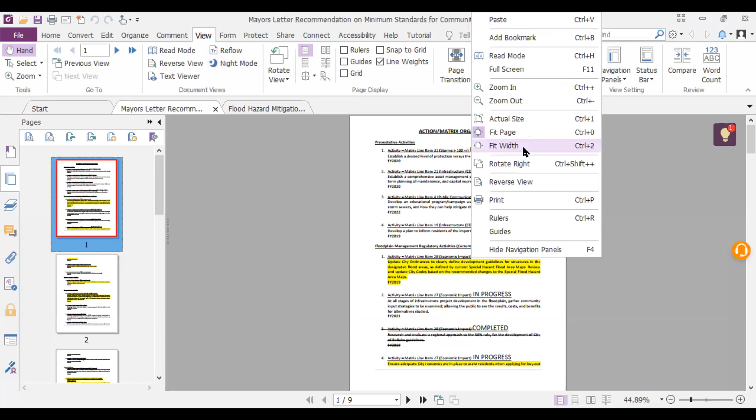Good evening. So before I get into my presentation, what I have up on the screen will look familiar to many of you that have taken part in these meetings in the past. I just want to take a little bit of time before I get into the update to bring us all back together. It's been a little while since we've met. And so as Brant has stated, in 2018, the City of Bellaire Flood Hazard Mitigation Plan was adopted by the City Council. Prior to that, you had a series of meetings over months, and during that time, we looked at flooding specifically to the City of Bellaire.

We looked at the hazards, we looked at mitigation efforts that we can do here in the City of Bellaire when it comes to flooding. And we looked at that in many different ways. The first way we looked at that was on a regional basis. Another way was what can we do on a regulatory basis? And lastly, we looked at flooding that takes place in the City of Bellaire on a local level. Once we ended, there were about 23 activities. At the end of that report was a matrix of here's what we saw as the hazard, here are common occurrences and the problem with that hazard, here are strategies we think we should do as a community to mitigate, and lastly, what are the action steps we're going to take to implement those mitigation strategies?

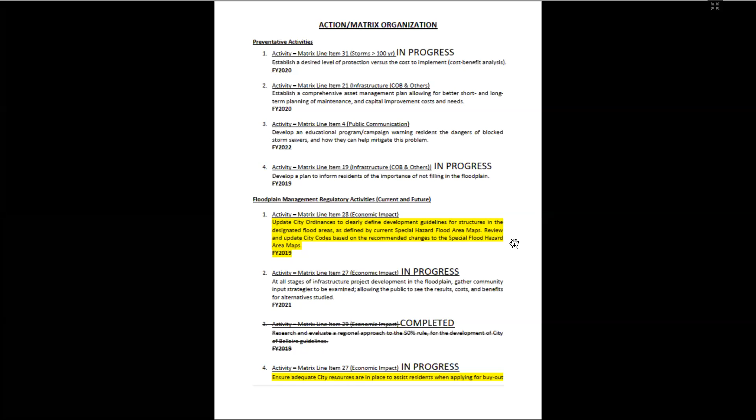And so the next activity is to ensure adequate city resources are in place to assist residents when applying for buyout and elevation grants. And even in our discussions, we've talked about how buyouts for the city of Bellaire right now may not be the best option, but we have kept on the front line home elevation and applying for home elevation grants. As I've reported to City Council, and I can't remember whether or not I was able to report to this group, the HMGP, the hazard mitigation grant that we had for home elevations, was not selected as a project. As of now, it's on the alternate list.

That means as the money is allocated to other projects, if by chance there's dollars left over, or if by chance someone doesn't spend their allocation for whatever reason, they choose not to, and they're looking for other projects, ours is on the alternate list where it could get selected. And that's for the 2017 Harvey HMGP grant dollars.

And so what also that application does as being an alternate is, and I'm not speaking this, Lord knows I'm not, but in the future, should other events take place and they're looking for projects, that one is already there sitting and waiting and ready. And so that's up on the list there.

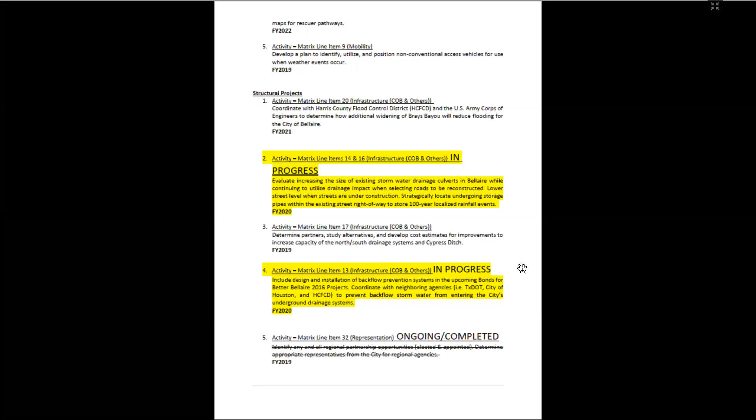The next one that's underway is create a proactive approach to repair and maintain drainage systems in desirable development areas and neighborhoods with storm drainage systems. Develop a schedule to perform routine maintenance, inspections, and repairs to stormwater infrastructure. Expedite a plan to repair and replace the highly critical local drainage systems in the current Bonds for Better Bellaire 2016.

Reevaluate the priorities annually and aggressively pursue future bond programs. If you've been paying attention to the current budget cycle, these are conversations they're having now. So tonight, if you choose to discuss whether this is still accurate, this is still the direction and recommendation you'd like to give the city council, now would be the time to say that, because we're at a good place in the budget cycle.

Next, and I believe this is my last one, is to evaluate the conversion of the Bellaire wastewater treatment plant and the dog park and soccer field along Edith into detention areas. Evaluate conversion of the trash transfer station at Beltway 8 and reservoir for Brays Bayou.

That was a mouthful. There are some new grant opportunities that have come about that give us a chance to evaluate whether this is a good project for those dollars. That's the CDBG MIT grant program. We have a presentation before City Council coming up here in September, so we're looking into that.

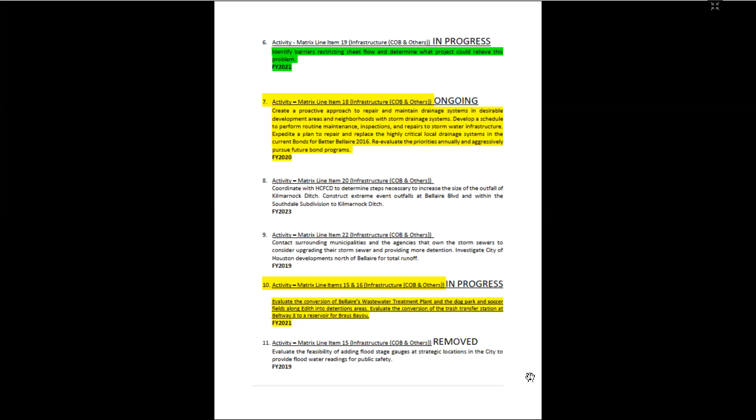It felt really good when I was updating this sheet to be able to say 'in progress,' because this was actually on the action steps for the Flood Hazard Task Force. This is tied into that same one: evaluate the transfer of wastewater treatment for the City of Bellaire, Houston facility, including hazard mitigation funding opportunities.

That's exactly what we're preparing for, getting ready for that grant application, which will be due sometime in October. So that concludes my update.

After going over the highlights, I've highlighted those that we're actually working on and can give you an update on. If I did not talk about it today, that means it's still on the list.

We have five years to work on all these projects, and some of these projects depend on funding. Some depend on something else that's happening in day-to-day operations. Once that takes place, we can start tackling these other activities. So that concludes it—if you guys have any questions, I'm here to answer them.

This is not just coming from Chavonne in Development Services, but this is a staff effort. We have staff members from the fire department, police department, parks, finance—just about someone from every department—that sits in and helps make sure the activities on this list are taking place.

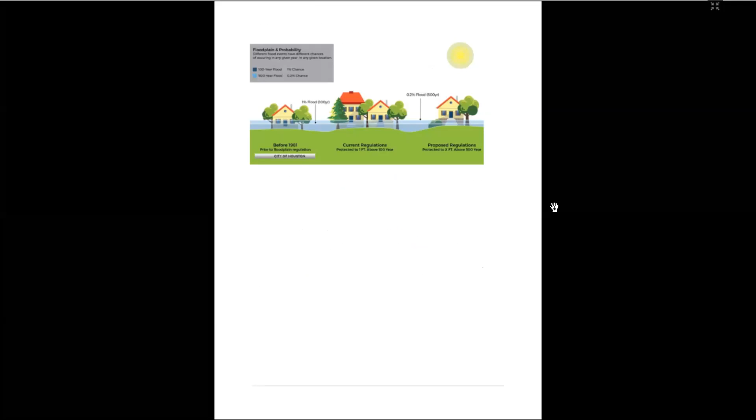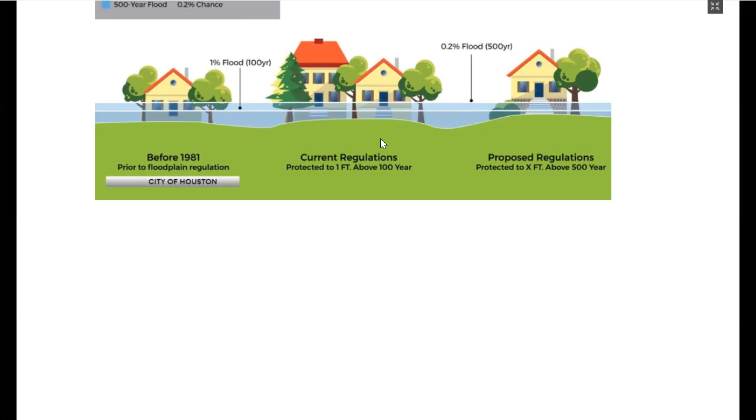The city has changed their requirements for setting finished floor elevations over the years based on flood data that becomes available. The current requirement is for the finished floors of new homes to be at the effective 100-year base flood elevation plus 1 foot. What the county is suggesting is to build the finished floor to the 500-year elevation, which in general is about 1.5 to 2 feet above the 100-year elevation. So if the city decided to adopt the county's policy of building finished floors to the 500-year flood elevation, that would effectively push finished floors about half a foot to 1 foot above the current minimum requirement.

So to reiterate, we currently go by the 100-year base flood elevation plus 1 foot, and that is generally a foot to 2 feet below the 500-year. So going up from the 100-year to the 500-year is half that much — half a foot or 1 foot higher.

Hopefully that explains the direct language from the county, which is to require the minimum finished floor elevation of new habitable structures be established at or floodproofed to the 500-year flood elevation as shown on the effective flood insurance study. Any questions about that? How will that affect the 50% rule? All right, you want me to answer that? Yes, I would appreciate it. Okay.

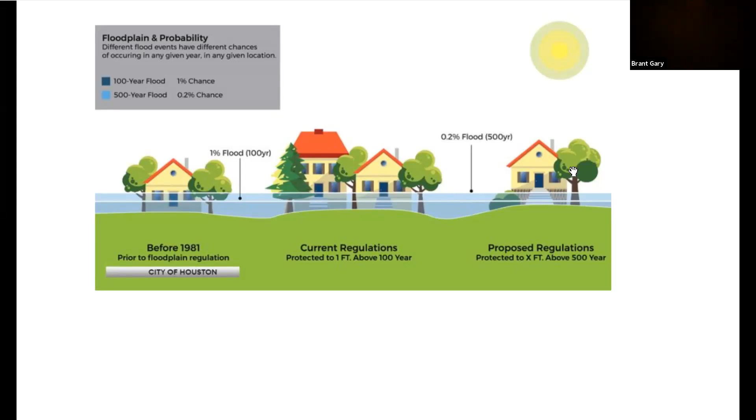And the next item on our agenda for this evening is a presentation concerning the Master Drainage Concept Plan. That will be introduced by Mr. Mike Leach, our Director of Public Works, and will include Mr. James Andrews, our City Engineer, as well as other members of the project team. So Mike, I will defer to you to introduce this item, and I will go ahead and bring up the presentation, and I can tab through if you just want to cue me once we get to that point. So Mike?

That sounds perfect. Thank you, Brant. Can everybody hear me okay? Yes, sir. Okay, thanks very much. Well, good evening, everyone. This is an exciting time for us.

We're here to review with you the results so far of the Master Drainage Concept Plan. So I'm going to steal a little bit of the thunder for the first few slides here, but not too much. As you may know, one of our objectives, as Chavonne mentioned earlier, was to work interlocally with our partners. As you know, drainage does not have any respect for jurisdictional boundaries. So when we were scoping this project, we thought it best to work with a couple of partners that are really instrumental in how our drainage actually operates in this area.

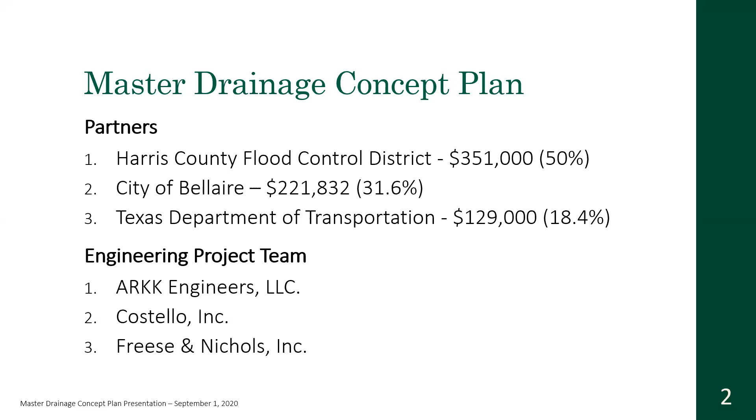Generally, the scope of work of the concept plan is as follows: determine drainage improvements for 10 and the 100-year storm events using Atlas 14 probabilities of rainfall volumes; determine 3 concepts for improvements with possible phasing; evaluate open channels, storm sewer, detention ponds, and flood tunnels, which we'll go through tonight; determine estimated mitigation volumes to mitigate peak flows along Brays Bayou; and review and analyze potential overflows coming into the city, as we talked to the task force about previously.

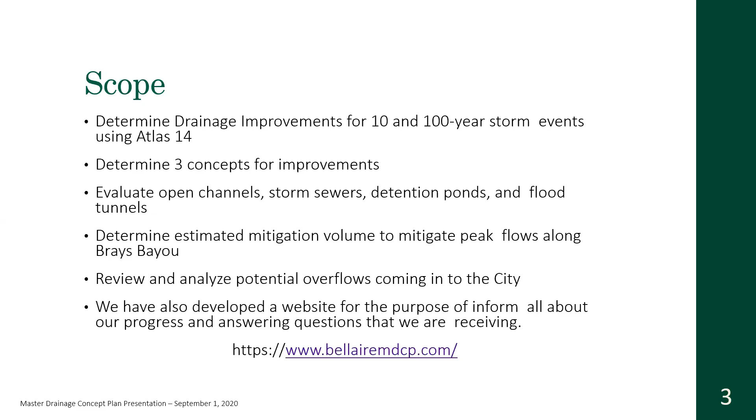Bellaire has flooded from various severe storms over the last century. Various degrees of flooding have really plagued the city, and for that matter, Southeast Texas, for decades. Even before Hurricane Harvey, there were several severe storms that produced flooding in the area. There are many contributing factors for flooding in the Bellaire area: the very high average annual rainfall of about 50 inches, the flat tabletop topography of the area, with about 5 feet of fall from the north side to the south side of Bellaire, clay soils that don't absorb water very well, and the proximity to Brays Bayou.

Stormwater from the city of Houston flows through Bellaire from the north and from the west, which we'll talk about in more detail. Stormwater runoff from Bellaire drains into undersized systems that are owned by others. And as mentioned, there are below base flood finished floor elevations of homes that were constructed prior to national flood insurance rate standards. Lastly, as areas of Bellaire were developed, neighborhoods didn't have a drainage master plan, so there was no real sheet flow analysis performed for the area as these subdivisions were built.

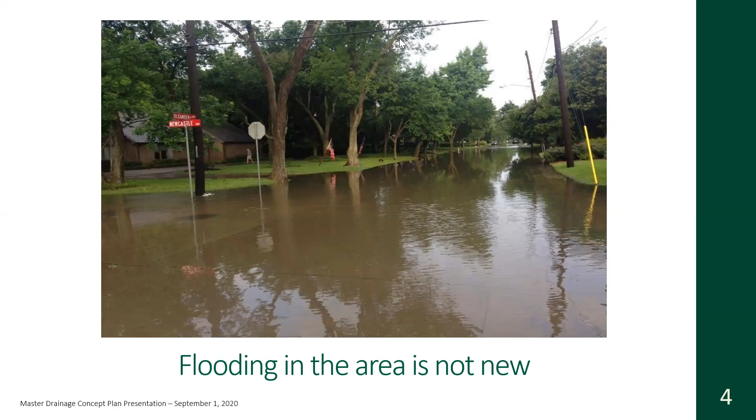Tropical Storm Allison and Hurricane Harvey are two storms where those two conditions occurred. A review of the Tropical Storm Allison flood event documentation showed approximately 1,432 homes were flooded in Bellaire, and over 1,000 of those homes were located east of 610. We're also showing data collected from the May 2015 Memorial Day flood, where 220 structures were flooded.

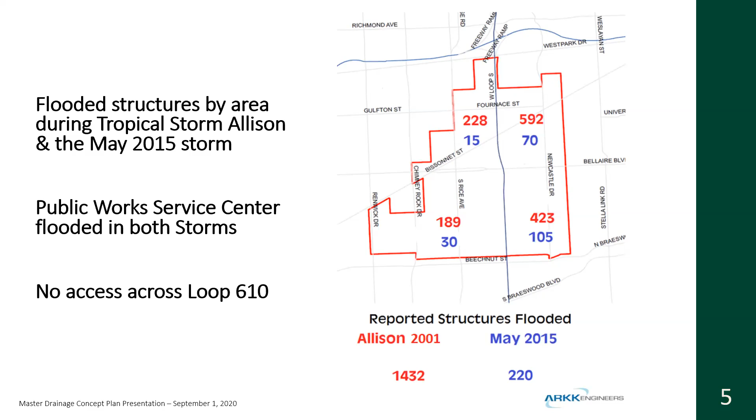This shows one of the problems during that May 2015 storm: the service road of 610 was flooded, and it made it impossible for emergency vehicles to cross 610.

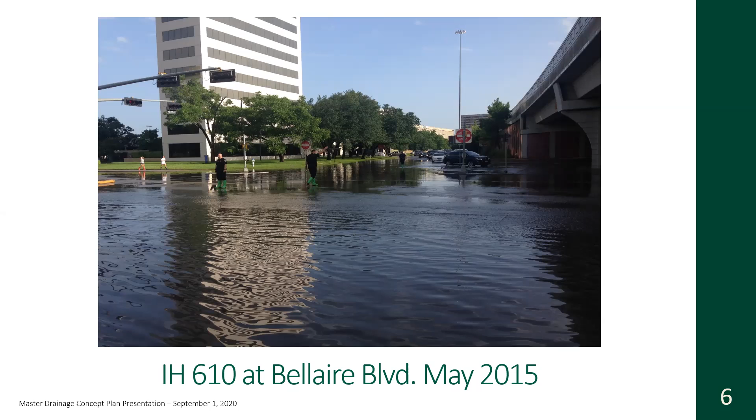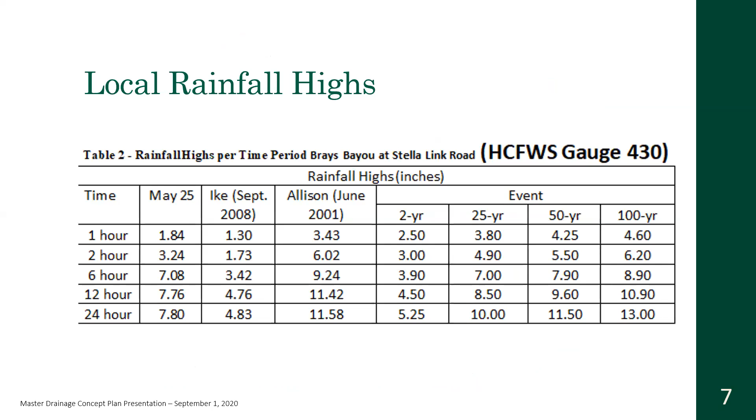This chart shows local rainfall numbers at a rainfall gauge at Brays Bayou and Stella Link, focusing on the May 2015 Memorial Day storm versus Allison. It shows Allison having higher intensity rainfall.

And then, of course, we've got to look at Hurricane Harvey. It was the big one. Next slide, please.

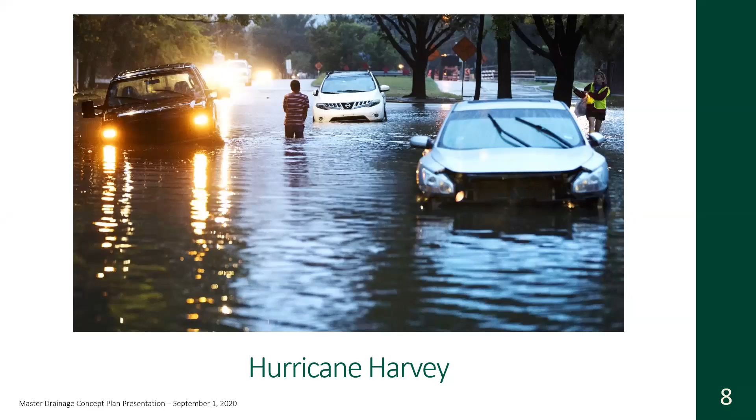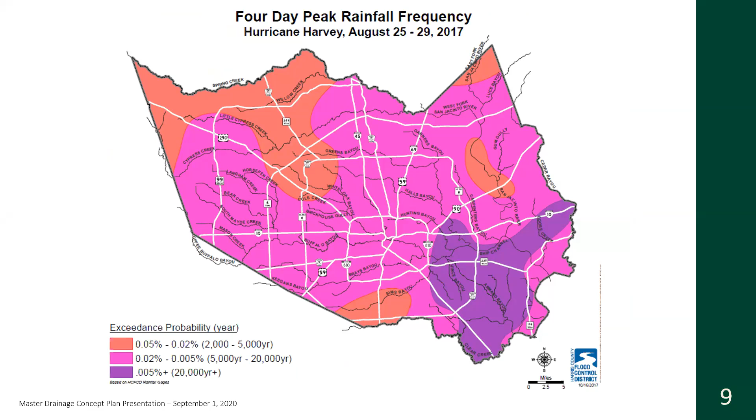Brays Bayou in the Bellaire area was out of its banks for a very long period of time, almost 2 days, and the local rainfall volumes were incredible. Next slide, please.

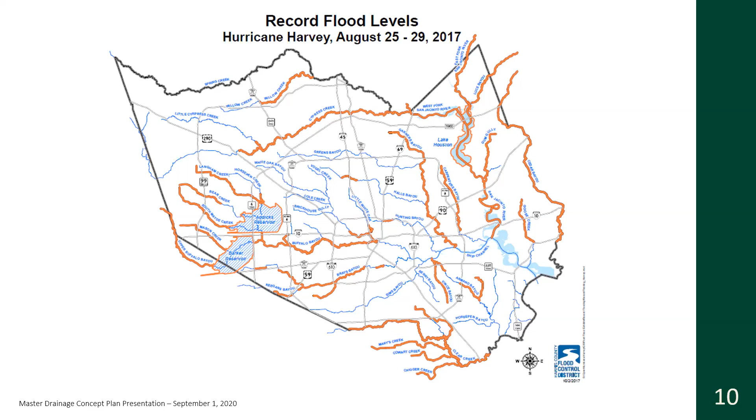In Bellaire alone, over 1,900 structures flooded in Harvey, and that does not include garages, which are generally lower than the house finished floors.

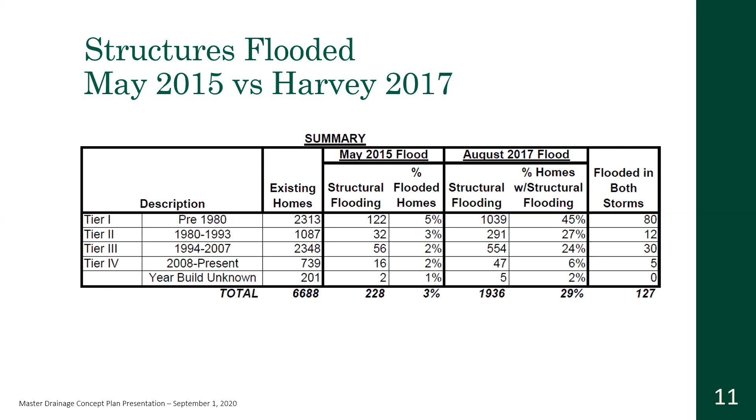What this chart does show is, if you look in the August 2017 flood, which is Harvey, out of the 1,936 homes that flooded, only 47 of those were ones that were built to the current standard for elevation. Next slide, please.

Overall, Hurricane Harvey flooded approximately 2,318 structures, including garages. The areas where the most structures flooded were located in the southeast quadrant of the city, followed by the south central quadrant of the city. Both of these areas, of course, are very close to Brays Bayou. Next slide, please.

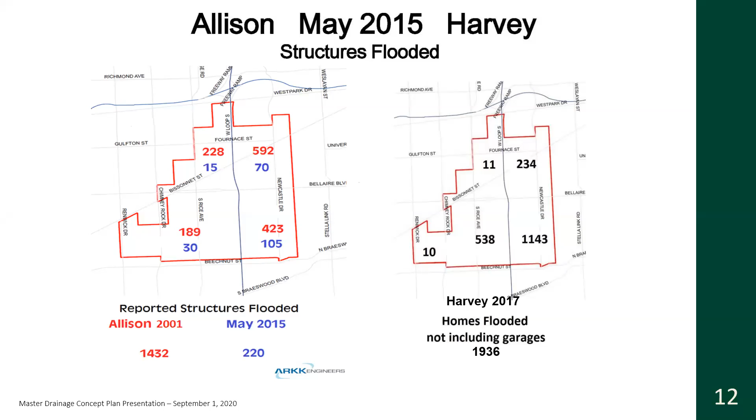There are about 10 major drainage systems that collect stormwater flowing into and within the city of Bellaire. 2 systems flow directly to Brays Bayou, and the others flow to Cypress Ditch, that is south of the city of Bellaire and actually located in the city of Houston. And there are 2 systems on the east side of the city that flow to Kilmarnock Ditch, which is owned by the city of West University Place.

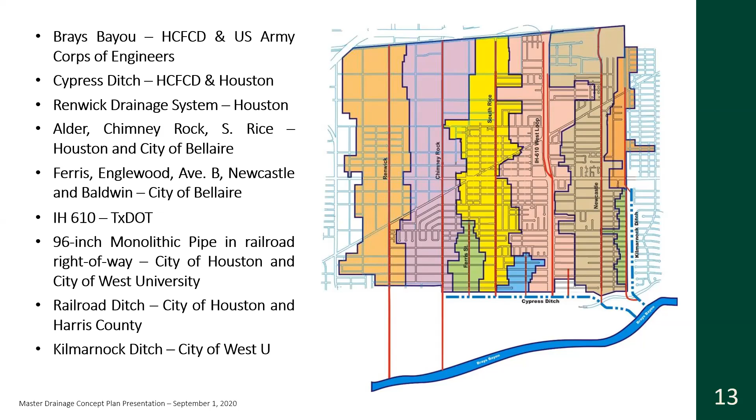Next slide, please. We covered this in Chavonne's report about the regulatory requirements for finished floors, of course, being higher than the original home sites.

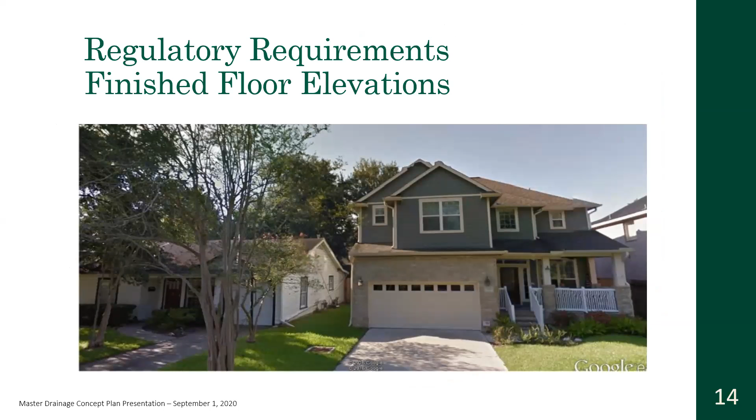Next slide, please. The city of Bellaire's 2016 drainage study and subsequent bond program recommended the critical need to partner with the Harris County Flood Control District and TxDOT to determine feasible solutions to improve the capacity of the large drainage systems to efficiently transport stormwater to Brays Bayou.

Another key recommendation of the 2016 study was to enlarge the local drainage systems to store or detain floodwaters underground where practical. This would provide relief to local streets during local extreme event storms by reducing the height of the floodwaters, helping reduce structural flooding.

We feel like this is very important to continue this local program because the existing drainage systems are undersized, and in many cases there is no underground drainage system for the streets. These new systems will provide even more benefit once they are connected to any improvements that are made to the major arterials going north-south, as we showed on that previous exhibit.

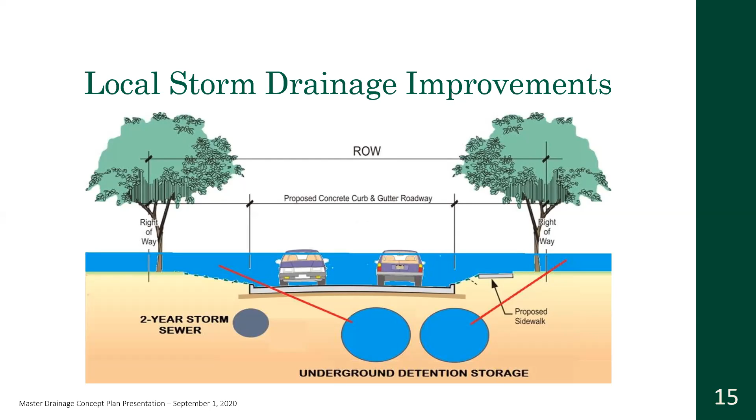Next slide, please. The city has also been able to partner with TxDOT on 2 occasions to improve drainage along 610. In the early 2000s, TxDOT and the city constructed an additional 10 by 10 box from Cypress Ditch up to about Cedar Street. More recently, we partnered with TxDOT as part of the current interchange project to improve the system from Glenmont to Terminal Street.

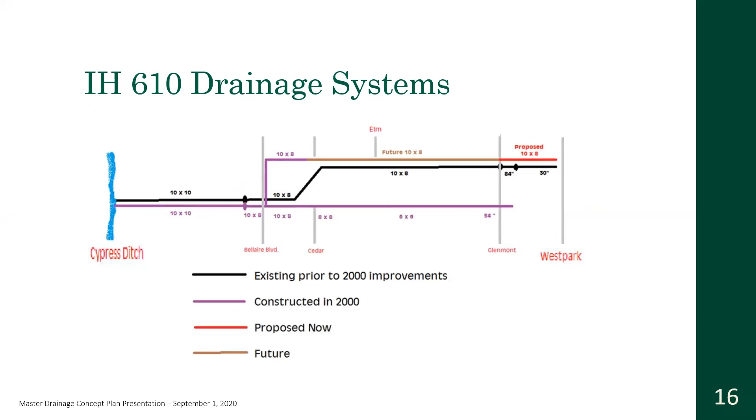It's highly developed. The upper end of it gets into Fort Bend County, and all that water comes back through y'all, right there across through Rice and where your Cypress Ditch ties into it. Next slide, please.

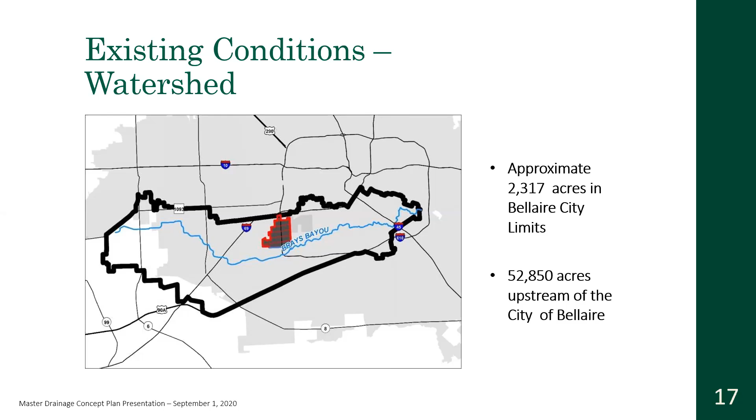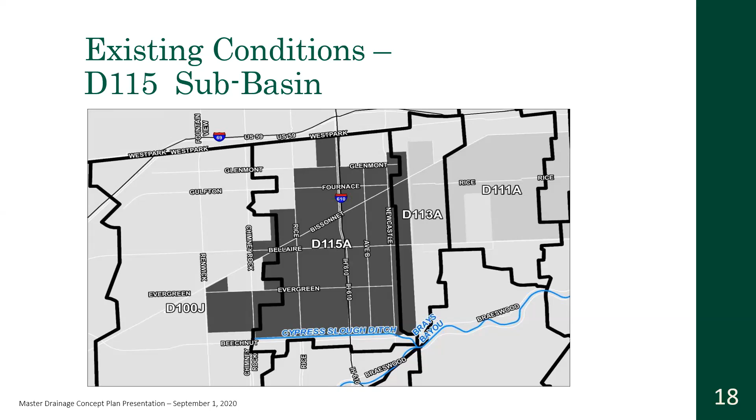Also, that D115 designation is Harris County Flood Control's designation for this subbasin. Cypress Ditch serves, during normal conditions, approximately 77% of the city limits, with the remaining being in the Chimney Rock system, a little bit in the Renwick, and then the Kilmarnock Ditch, as James previously mentioned. Next slide, please.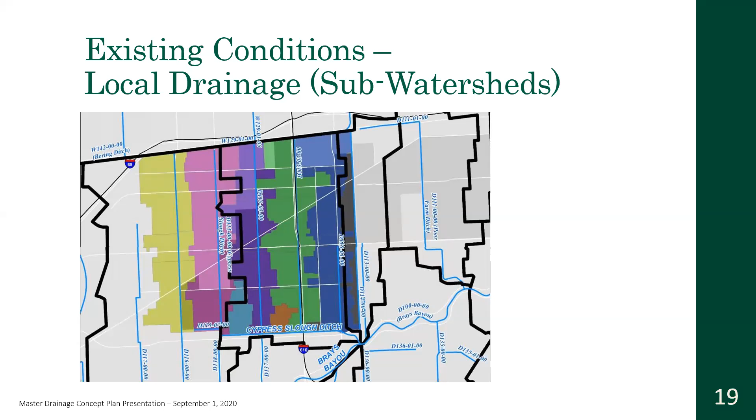system. Similarly, the green in the middle is the 610, and that'll get into those pipes that James was discussing going down the 610 frontage road. And then you have the Rice system, and then you have Chimney Rock in purple and Renwick in the light yellow. So those are generally your north-south systems that provide the major drainage infrastructure for the city limits. Next slide, please.

So when I was saying those drainage boundaries operate under normal conditions, when you have a large rain event similar to TS Allison or Harvey, what happens is that water tends to not obey those boundaries, and it will follow what the natural topography was before whatever the man-made system was that was created. So as you see here, what you're seeing is a heat map of the LIDAR, which is detailed topographic elevations. We have it across all of Harris County, the whole Gulf Coast region.

This is pretty detailed information, and what it's telling you is that when you see those whites on your left side, that is a higher elevation than the yellows and greens you see on the right side. So if you follow that colorization, you can see generally that land is flowing west to east. And then over the years, we have built man-made systems that go north to south to try to collect that water and take it down to Brays.

The issue is when you have the big events and the north-south system doesn't have capacity anymore, that water will overflow or sheet flow following this topography. And so that means water is going to continually go from west to east, and is going to jump each system as each system loses capacity. And then unfortunately, it gets to your east end where you have the railroad track, that creates a damming effect that kind of captures it and gets it down that southeast end.

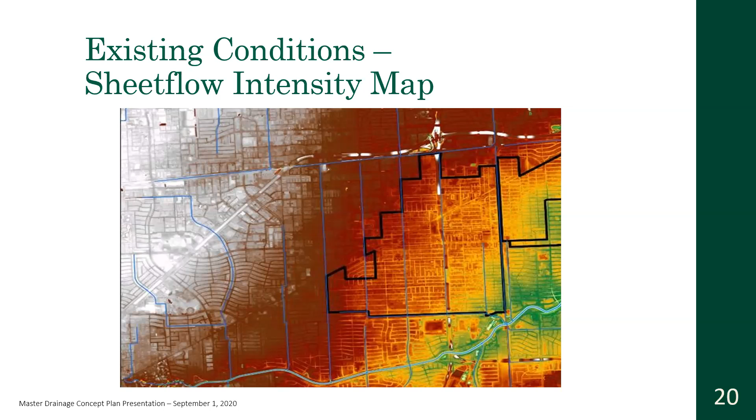You can see on the southeast corner of the city limits, those greens that are inside it. That means that's some pretty low land over there. So you have sheet flow coming, and you have Brays Bayou itself creating some floodplain. Next slide, please.

So what you're seeing here is similar to the topography, but this is a depth flooding map. And this is from the detailed two-dimensional hydraulic model that we're currently developing for y'all right now. And what this model does is, based on the rainfall inputs that we put in, your topography, your land use characteristics, the sizes of your north-south systems, it starts computing and figuring out which direction the water is going to go based on whatever the surrounding flooding conditions are.

And this is the preliminary results of the 100-year floodplain as it flows through the city. You can see on Chimney Rock some pretty deep purples. That's some pretty deep flooding there, from 3 to 4 feet. And what's occurring is the model is seeing water come across your city limit line there and entering into the city of Bellaire. And then as we go kind of to the east,

Can y'all hear me? We can now. We lost you for a minute there. Oh, you did? Yeah, lost you. It came up and said y'all muted me. I thought maybe Brant got tired of me and went to sleep. No, you're good. Okay. So did y'all hear me talk about 610? No. Okay. Did y'all hear me talk about the depth flooding map? I'm sorry. No, not really. Okay. So I'll start over on this slide.

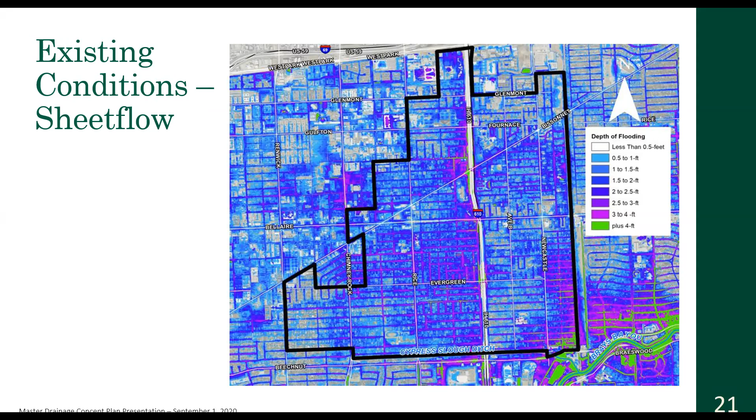And so what it's measuring is it's looking at the conditions along Chimney Rock and Rice and Newcastle, and it's saying, okay, how much water can travel through the storm sewer down the Cypress Ditch and out the Brays, and then if it can't handle that, where does the water go, which is continually overflowing to the east. And you can kind of see there along 610, a lot of that sheet flow gets up against it and it kind of ponds up.

That's what those greens and purples are. And you can kind of see the same effect on the east side, east of Newcastle, right against the railroad track. Hey, quick question. This is a 24-hour, 100-year event, or what's causing this now? This is a 100-year, 24-hour Atlas 14 event. These are preliminary results from the model that we have right now. That is correct. So that's about, I think, 16.9 inches of rain in 24 hours. That's what you're seeing the result of right here.

And then one thing we did do is we have an analysis line along Chimney Rock so we can see how much water is entering the city limits. And we're utilizing this in our later calculations to help size some north-south systems to handle that flow. Stephen, real quick, this is Brant. Just to clarify on something you said earlier, you mentioned the typical Atlas 14 storm of the 16 inches over a 24-hour period, correct? Correct. 16.9 inches. Okay, and that is an even distribution during that 24-hour period, correct?

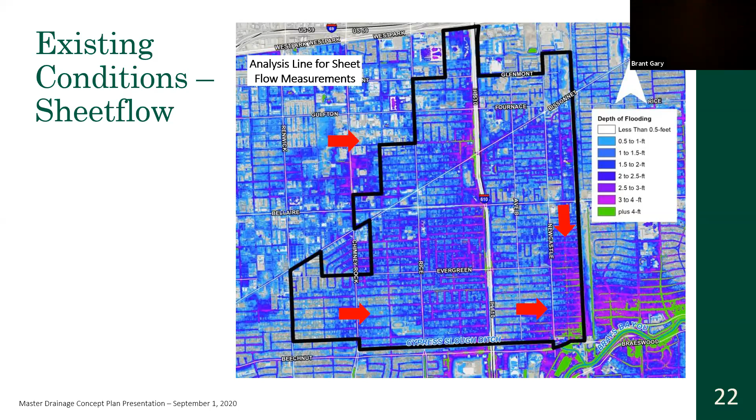No, it is not an even distribution. There is a distribution in the flood control manual that generally centers the peak intensity of the storm at roughly hour 16. And then it alternates out. Okay. So you'll see a big high intensity rain in the model around hour 14 to 20. And that's really what causes a lot of your problems. Thank you for that. So I guess next slide.

So as we're going through the concept plan and trying to develop some solutions, these are just some typical examples of flood control features that we're looking at. You've got detention ponds, used to hold water and detain it and reduce flow rates. We have drainage channels, which are real good at moving water and getting it out of the city or wherever it needs to be. Storm sewers, which y'all are probably pretty familiar with. That's 95% of what serves the city of Bellaire right now. Pump stations have unique interactions with the system, and they can be beneficial in certain situations.

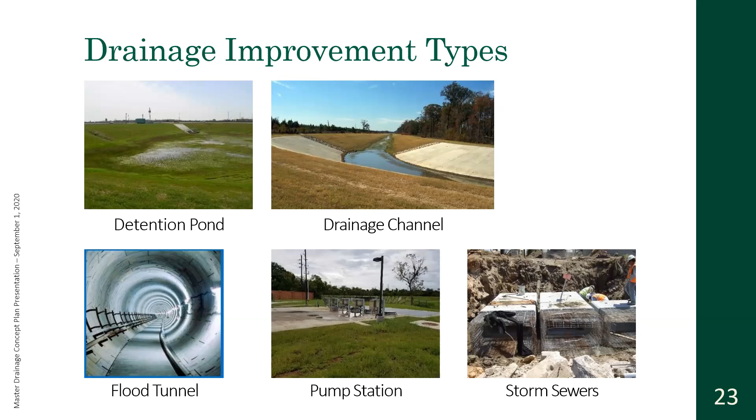And then the last thing that we've been looking at is flood tunnels, mainly because y'all are a fairly well-developed area. There's not a lot of green space. You can see in those pictures, drainage channels and detention ponds take up green space. So flood tunnels are kind of a newer technology to the Houston area. I'm going to turn it over to Brian to give you a quick preview of flood tunnels and how they could be utilized in the city of Bellaire. Sure thing. Thanks, Stephen. Brian Gettinger, Freese and Nichols here.

Tunnels are my personal area of expertise, and I've been helping the team analyze them as part of this concept development. This is a concept that has had a little bit of press in Houston over the last 3 years since Hurricane Harvey, as an opportunity to help mitigate stormwater impacts without a lot of surface disruption. The reason you do a tunnel project is, as Stephen noted, you've got an urban environment that's highly developed. You've got streets, other utilities, buildings, trees, things you don't want to tear up, but you need to move a lot of stormwater. For this Bellaire study, we've assumed an inverted siphon.

An inverted siphon operates entirely by gravity during a storm event, because of the upstream elevation. As Stephen showed on previous topographic maps, we have a higher elevation on the north and west side of the city, and a lower elevation on the south and east side. The tunnel would start on the north side and move to the south and east side, and as the tunnel fills up, the change in elevation will actually move water through the tunnel, and the rate at which it moves that water is a function of how big the tunnel is and how many feet of elevation there are. There are actually other tunnels like this in Texas. Probably most famous is the San Antonio River Tunnel, which protects the Riverwalk in San Antonio.

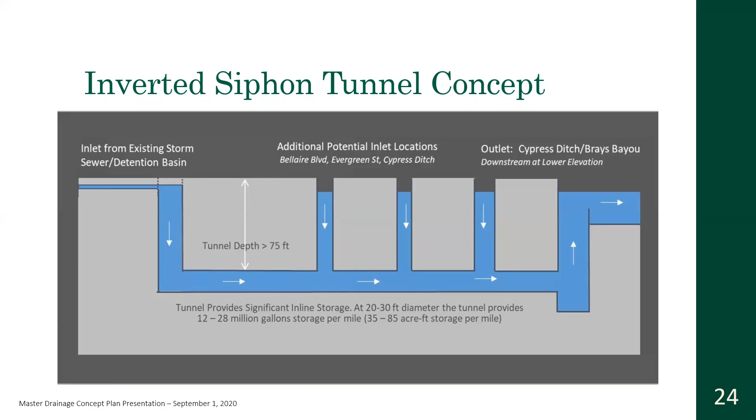If you guys want to watch a kind of a cool video about how this works, if you go to YouTube and look for earth pressure balance tunnel boring machine, there's some really awesome, a couple minute long YouTube videos showing how the system works.

But essentially, in Houston, we have poor soils generally. We have high groundwater, and that's a combination that makes it very difficult to excavate. And we're talking about here a tunnel that might be 20 or 30 feet in diameter and 100 feet deep. And if we were talking about this in 1950 or 1960, this wasn't something that was possible to build.

But the technology has improved dramatically over the last 10 to even 20 years, where the types of soils that we have here, just like in Washington, D.C., are very excavatable by the current technology. The machine's actually able to excavate and fully support the ground and the groundwater. So there's no settlement, and there's no impacts to the surface.

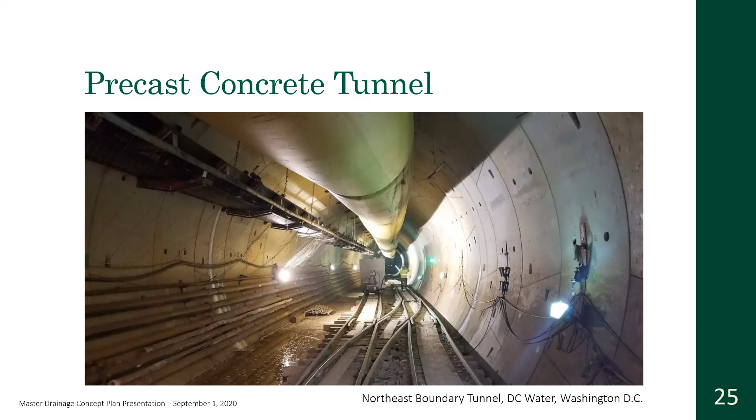So a tunnel like this can mine for 3 to 5 miles between shaft sites if you needed to, and along that route there's no sound, there's no vibration, there's no dust. So all the complaints that we see from other kinds of construction projects are really only isolated to the shaft locations on a tunnel. You can go ahead and go on to the next slide.

So the next question is, okay, if the problem is isolated to a shaft site, what does the shaft site look like? In all cases, because the tunnel is going to flow to Brays Bayou on the south end, the tunnel would start at Brays Bayou, and so your largest area of disturbance is near the bayou. We're looking at a few different sites there that could be potentially used for that, which are a couple acres in size. The other structures along the tunnel are just to get flow into it, and so those are drop structures. They're a lot smaller.

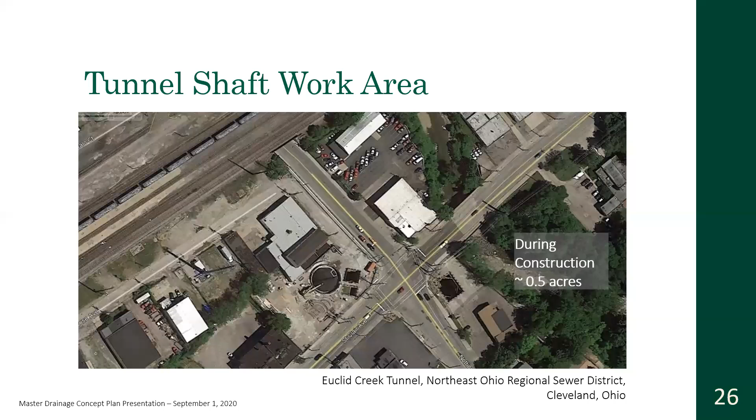The example here is from Cleveland, Ohio, another tunnel project. It's at about a half-acre shaft site. You see there in the middle of the page, there's a circle with a crane hanging over it from a satellite image. And then on the right side of the intersection, there's kind of a rectangular excavation. So you've got a couple different excavations in order to tie flow in from a near surface sewer into that tunnel. And then on to the next slide, you can see what that looks like after construction. So it's a pretty small area during construction.

But tunnels are the solution that you use when other methods are too disruptive or too challenging on a cost basis because of the number of utilities that need to be relocated. The challenge on tunnels is, generally speaking, they're more expensive than other solutions. And so they are often the option of last resort.

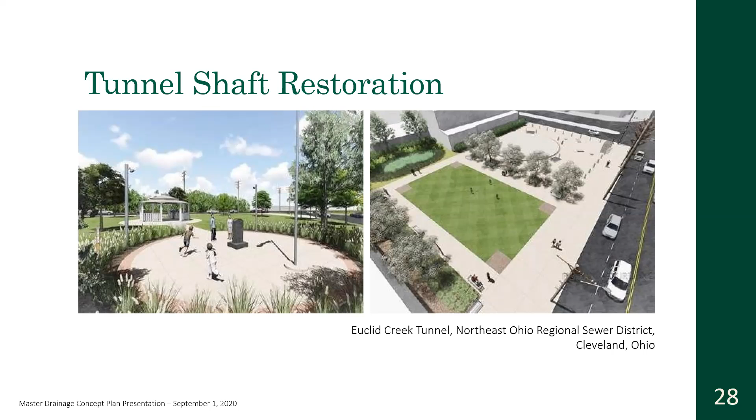But in an urban area with high property values, particularly along Bellaire Boulevard where you've got a lot of trees and things, we don't want to disrupt that. With other kinds of infrastructure, tunnels can be a solution that can work, and that's why we're evaluating that as part of the study. Next slide.

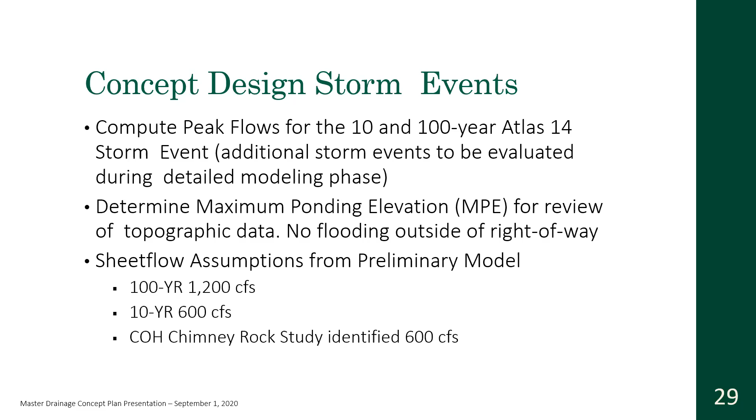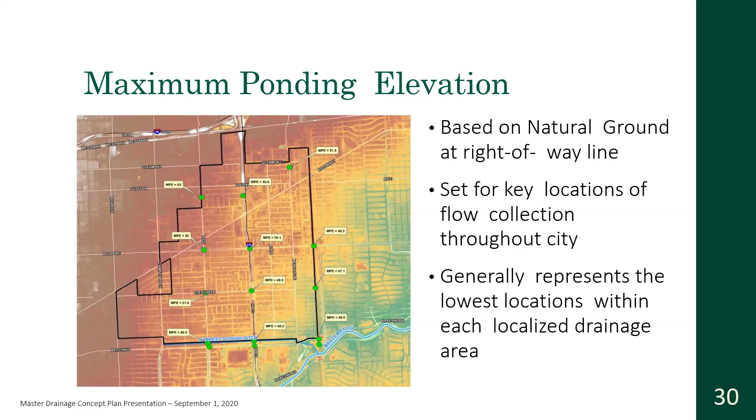Next slide, please. So we evaluated 3 concepts, and like everything in life, there are good things and bad things about each one. It's going to be up to y'all to provide guidance on which makes the most sense for your particular situation.

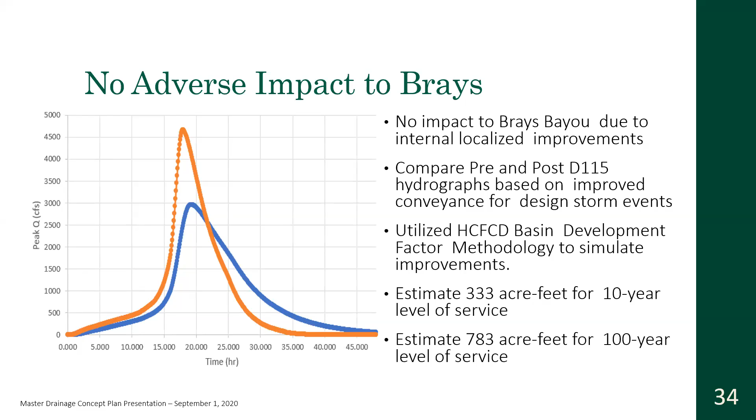We looked at some options of putting a tunnel or major storm sewer system underneath it. Initial estimates were showing that was probably going to be less cost effective than just concrete lining the channel, but further details to come as we progress through the detailed part of the study. Next slide, please.

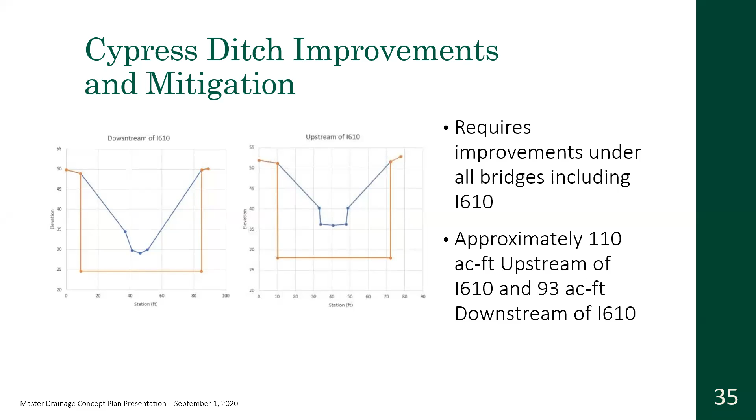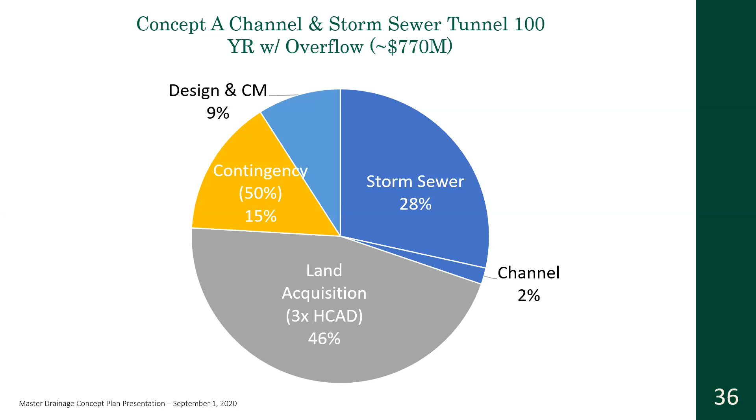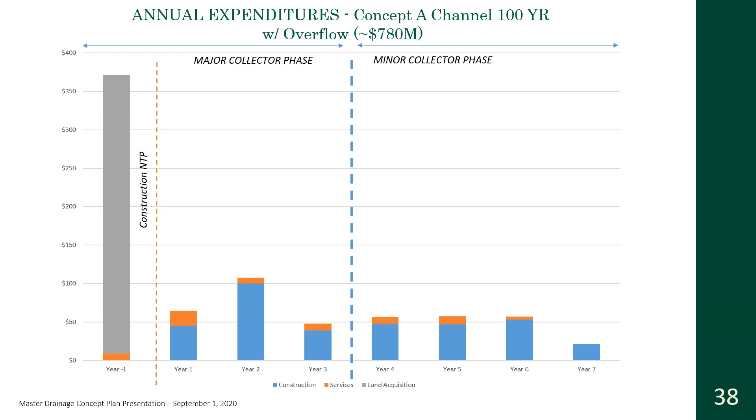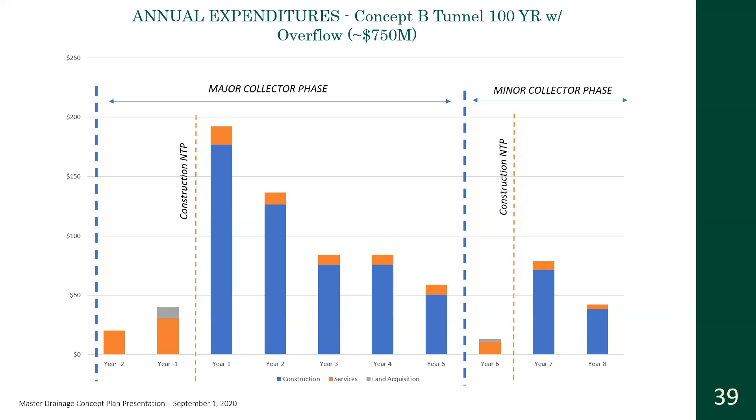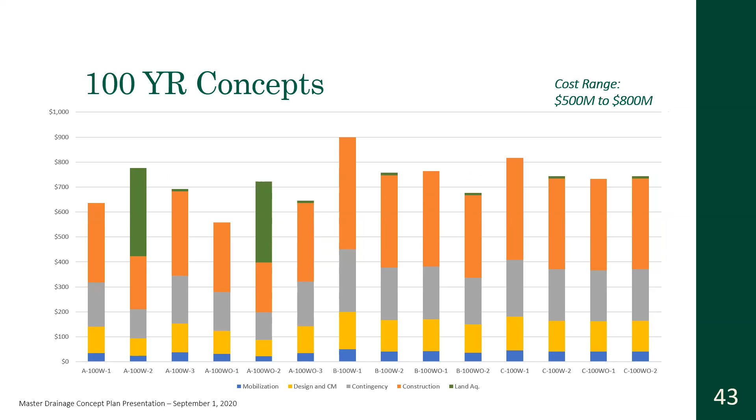Same comparison. This is just 100-year level of service now. Similar story to the 10-year. They're all fairly comparable, and there's nothing that really sticks out and says this is the best option from a cost standpoint.

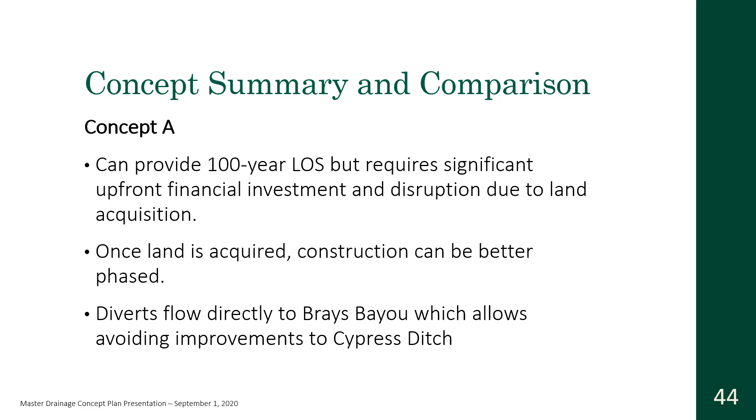One of the downsides to Concept A is just how much money you've got to spend up front, so it's a big upfront investment.

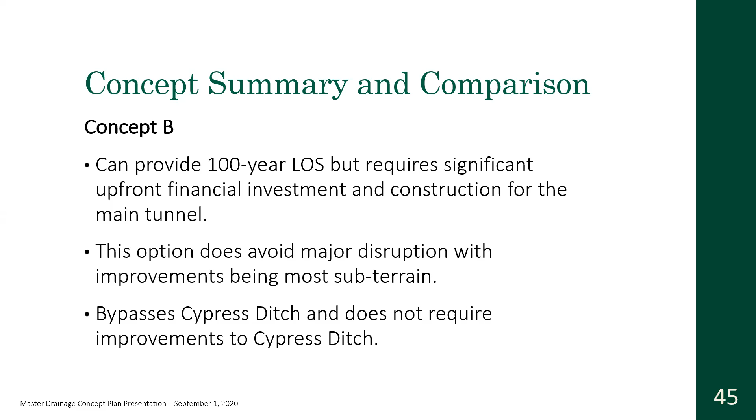As Brian was describing in the tunnel section, you'll avoid any major disruptions with building the tunnel because it's all underground. You just have the shaft sites, and it can be much more managed, which may be an important consideration given how developed the city is and how little space there is to work with for a major improvement. This concept also bypasses Cypress Ditch and gets that water directly to Brays, which saves you money on the Cypress Ditch side.

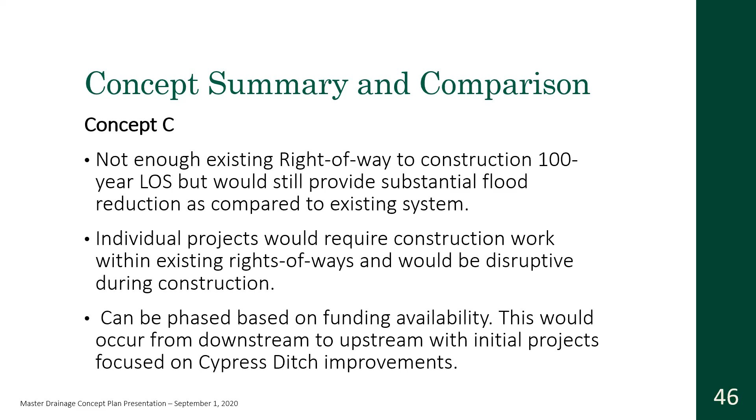And Stephen, this is Brant. I'll introduce these next two slides and we can go through them. As we were working through the presentation, we had conversations among staff, along with the engineering team, to look at what our initial observations were for the findings you've seen here this evening, and some potential next steps. What we want to look at is identifying a path forward that includes some practicality and some means to look at these huge projects and budgets, and really start to parse them down into, as was alluded to earlier, some manageable pieces.

So we talk about the concept of value engineering, some of the initial concepts that you saw, looking for that low-hanging fruit or some smaller projects that are consistent with the findings and with the overall direction that this study takes, looking very closely at phasing, breaking it up into more manageable chunks, and then looking at the benefits for each concept and level of service. Obviously, what we're focusing on is removing structures from that flood risk.

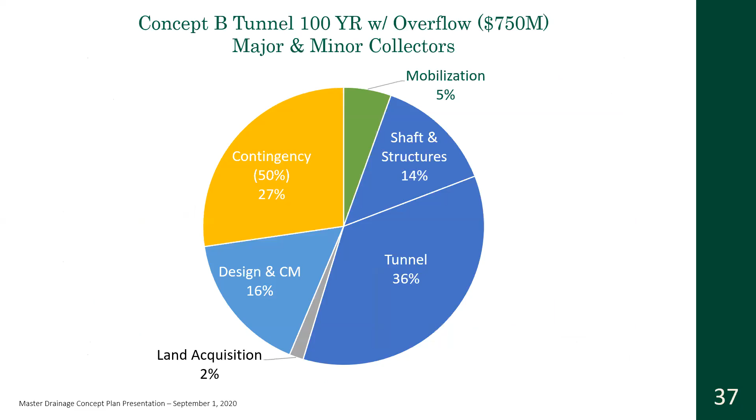Hey, real quick, slide 31, Stephen. Brant, if you can go to 31. On the east side under concept A, you're proposing a channel, is that correct? A channel or a tunnel. How much right of way are you taking? And I assume that's not inside the railroad right of way, is that correct? That would be correct. How wide is that? It's about 200 to 250 feet, depending on which level of service we design it for.

So just to confirm, that's about 6 houses. It's more than 6 houses. That'd be 200 to 250 feet wide along that entire stretch there. Yeah, 6 houses, okay. Okay, you mean 6 houses at the end, I understand. Yes. So that's why that land acquisition number is so high. Yeah. Okay. Chris, does that answer your question? Yes, thank you. All right, thanks.

Mr. Hosey, I believe you had a question? Yes. Are you aware of whether City of Bellaire has eminent domain, can force people to sell their property to us? That is a tool that is available to local governments for a project such as this. Actually, for any project, it is certainly not a route that I would personally recommend. But we're very preliminary at this stage, and I think that we would look at property acquisition on a voluntary level first. Having had to go through the condemnation process in the past in other places, I can tell you that if you want to slow your project down and increase your costs, that is the way to go. So it's certainly not something I would recommend.

So there's been some questions that have sort of touched on this topic of the contribution that Bellaire would have to make, and certainly we see the contribution that we made with regard to the overall concept and study. But it seems to me, and of course I've already seen this, so I have a bit of a benefit over some of the others perhaps, that at some point in time, a lot of what we're talking about, whether it's condemnation or tunnels or railroads or talking to the railroad or talking to Centerpoint and all these various intergovernmental type discussions, agreements, what have you, eventually we're not going to be able financially to do anything near what some of these other entities are going to be able to do.

You know, we have a fairly strong pushback from our residents on a daily basis, pretty much on taxes and bonds and what have you. And so, when are we going to get an idea in this process of just how much we can rely upon some of the bigger players with regard to some of these concepts? Because it'll be real easy for this group to sit around and go, oh, well, we like B versus A or B versus C or A versus C. But at the end of the day, I just don't see, from my perspective, us being able to pay for any of that, not during our lifetimes.

And so when does that come into play, and what is the protocol for us to evaluate these options? Because I think a critical component is going to be ultimately how much these other people are going to come in and pay for this. We can do what we can do here, and we've done some things in the past, and we can certainly do some things in the future. But to me, that's a bigger driver, because we can philosophically discuss all these concepts till the cows come home. But at the end of the day, and I agree with Millie, we do need to do something. The question is, what can we do? What will others do? How far can we participate? And how much bang for the buck can we get for our citizens and residents here?

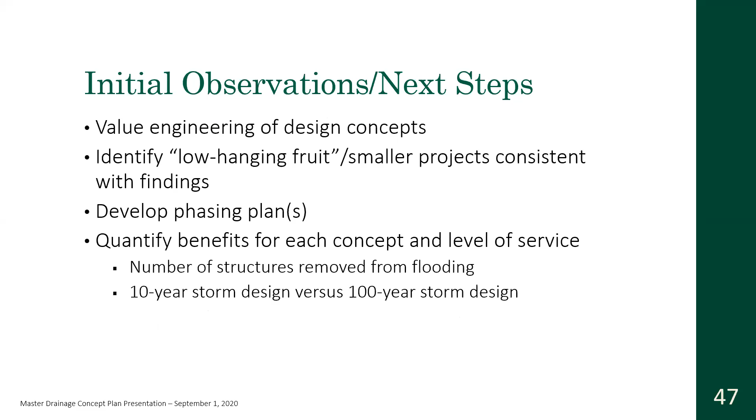What is something that we can appropriately phase that all 3 entities and perhaps even the city of Houston can venture into, which, at this point, to me, it's looking more like concept C for the phasing opportunities. But we've still got more modeling to do, much more information to work through before we get to that point. And so, James, I think... I'm sorry, Brian, go ahead.

I think one of the big things that's critical is when Stephen has the model complete, one thing we have to verify, and this is not an Army Corps of Engineers project, but we need to make sure that whatever options we're proceeding with, we can demonstrate to you, the committee, to the taxpayers, to Harris County Flood Control and TxDOT that whatever the capital cost of this project is, we are going to provide that much flood damage reduction, right?

And that we can then, with the model, identify how many structures are going to be removed from the floodplain, how many people are going to be removed from the floodplain, how many businesses are removed from the floodplain. Because in all cases here, we're talking about a major capital investment that's going to need justification. And Stephen's got some good images here in this presentation, but once that model's complete, we can run a before and after scenario of these. We can make sure the sizing is appropriate to provide the benefit necessary.

And we can provide some figures that can demonstrate that the water here was 4 feet before this project, and then after the project, the water was 2 inches deep, for example, and it takes this many structures out of the floodplain. I think once that model is complete and we have that kind of a justification, and we can compare concept A, concept B, concept C, or maybe even some subvariants of those, we can use that as a tool to demonstrate the benefit. Because if we can't demonstrate a strong benefit, there's no way for us to justify the funding, whether from the city of Bellaire or TxDOT or Flood Control District.

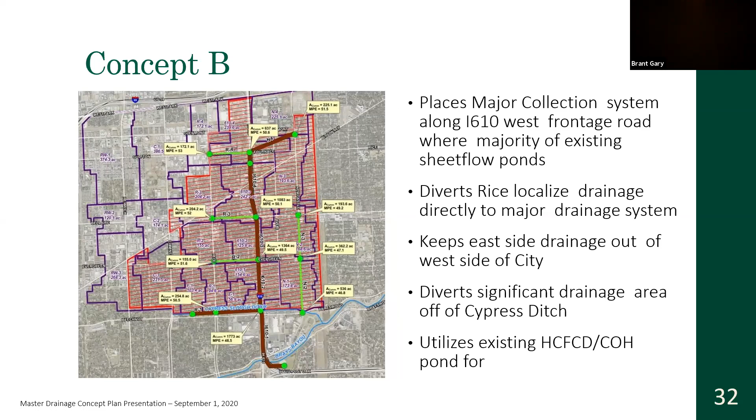And obviously when we're looking at B here, we're talking about 610, which has its own set of issues. So I think in terms of where we go next, we have an idea that we want to avoid large-scale acquisitions. So as we're talking to our partners, I think that can at least be a theme, with the understanding that I'm not making an incorrect assumption, but that can be a theme as we continue our conversations and our analysis.

And Ms. Hast, I see you have your hand up. Yeah, well, I think it's true that condemning houses would certainly need to be a last resort. But before I can really decide which of the three concepts would be preferable in my mind, I would need to know the information that you said you would have by December - which is what exactly will each of the concepts do in terms of reducing flooding.

And I don't think we really have that information yet. That is correct, so there's a good part of that cost benefit analysis that we don't have the variables for yet. I think we can look at the concepts and some of the necessary steps involved, and we have an idea of some of the preferences that might be out there with how any project would proceed. But you're certainly correct that there are still some variables missing in terms of the overall cost benefit analysis. Mr. Rychek, I see you had a question or a comment.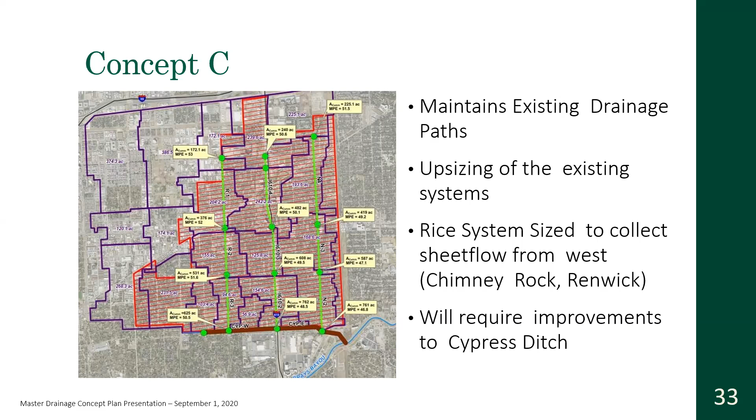Yeah, I think though the feedback from this meeting is important. For example, on concept A, Stephen, James and I can think about how we could change that east corridor to not have that acquisition. What else could we do over there on the east side to get the same benefit without having that acquisition? So this has been a really useful meeting, in my opinion, to get the feedback, even though we're not making a decision today, and we aren't asking you guys to make a decision today, but this feedback we're getting is valuable.

Hey Brian, Chris, one more comment I'd say. I certainly think in your report constructability phasing matters, because if somebody's going to drop a billion dollars in, a regional partner's fantastic, we can do everything. But just how we bite an elephant to improve the level of service for folks in Bellaire, knowing that we don't get the full nugget, we get parts of it. How we can do that incrementally to benefit some residents of Bellaire along the way is important, so that we can at least make decisions on getting something done instead of having to throw our hands up and wait for the federal government to come in. So again, that may be a concept C issue with the phasing, but just think about that, knowing that's one of the issues about where the funding is coming from.

Yep, good point. So I want to throw that back out there. James, Stephen, Brian, is there any other feedback or consensus that we would need at this point, knowing full well that we have additional information to prepare? Is there anything at all that you all would like to hear from the task force and its members?